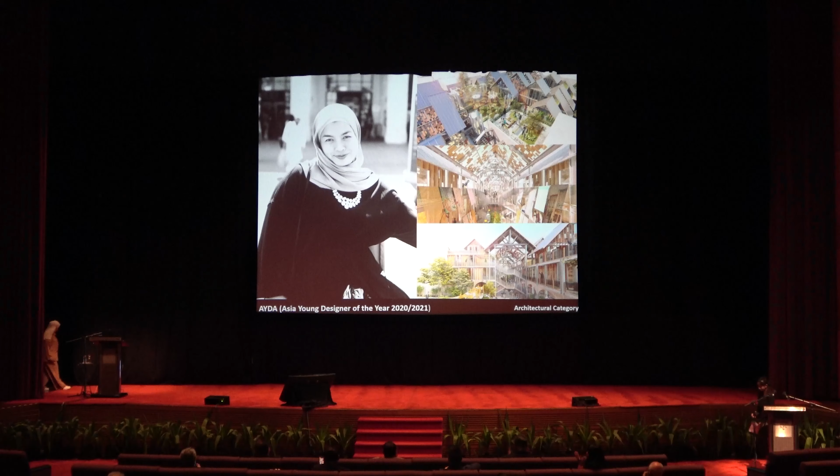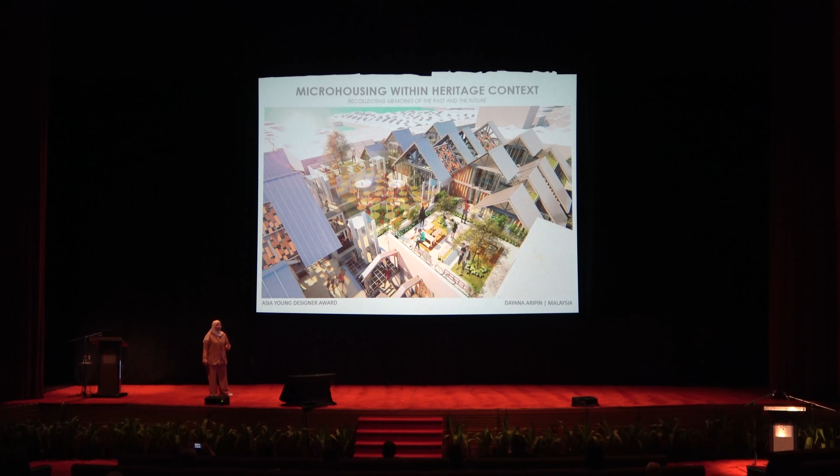Hello, can you hear my voice? Okay. Hi everyone, my name is Dayana binti Arifin and today I will be presenting about my project, which is microhousing within heritage context.

I believe some of you may have heard this quote from Jan Gehl, that each city has its own soul, built by the people, and it should not be erased by gentrification, because this is what is currently happening in Georgetown. This project, of course, is to instill back the old soul into the city.

Before that, let me take you back in time. Georgetown, as one of the UNESCO heritage cities in the world, was known as a trading center, and it flourished with so many people. And the cultures, what could I say, they're so vibrant. However, due to the gentrification and modernization, the soul of the city is dying.

As far as I remember, Georgetown has always been socio-culturally robust, attracting so many people. It is just a matter of time that the core soul of the city will be forever gone.

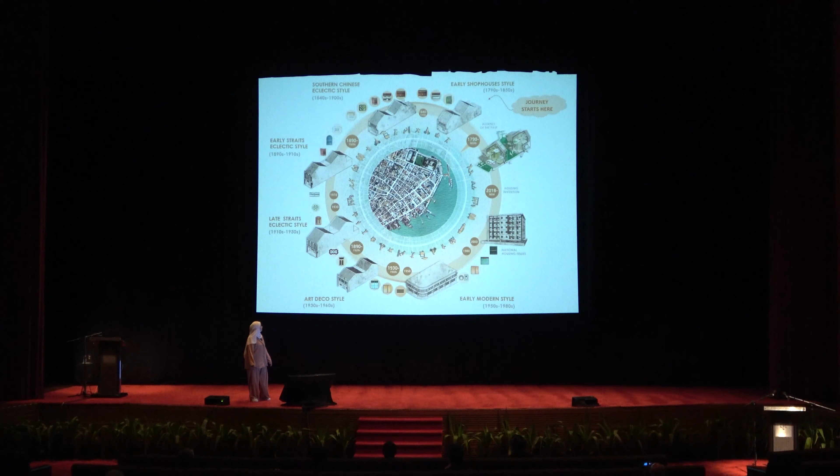As a summary, this timeline is showing the beautiful Georgetown itself. However, due to the Rent Act that was repealed in 1999, it caused many of Georgetown's people to move out of the city center. This has not only changed the demographic, but also the traditions among the community that it once had.

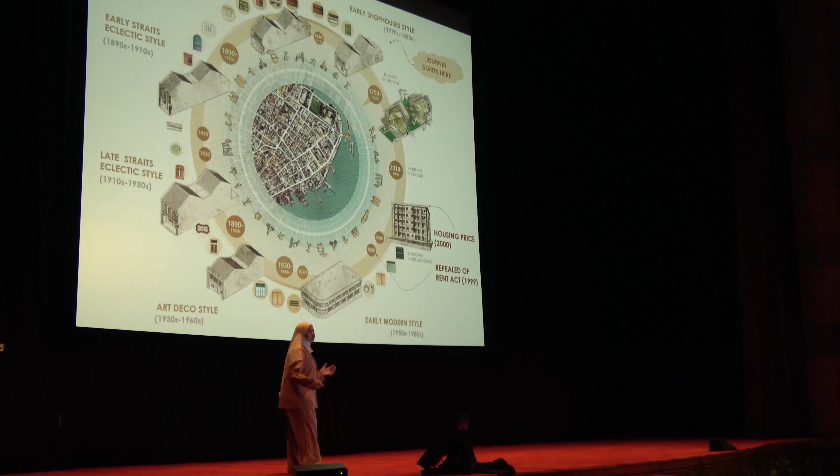And sadly, as it seems, Georgetown, or on a larger scale Malaysia, we have been facing unaffordable housing issues for a long time. Just imagine that people like you and me here, young people, we can't even afford to buy a house now, let alone rent a house within the city center.

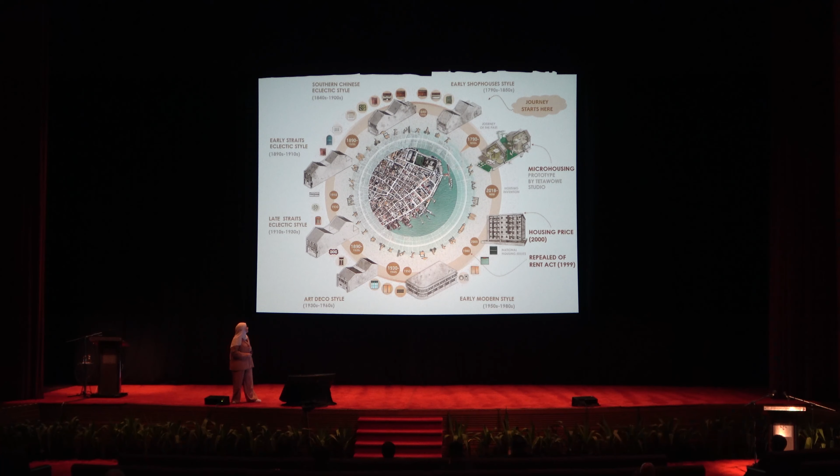And I believe that this is where microhousing comes in, where it demonstrates the capacity of providing homes in between urban spaces. But in this context, it is a city of heritage, Georgetown.

As the name depicts, microhousing is a smaller scale house within urbanscapes. The intention is to cater for urban dwellers who want to reduce their rental price and traveling time to workplace.

This intervention program could also bridge the gap of social decay and economical issues, as right now Georgetown has been relying too much on tourism values. And look at us now - we have a pandemic. Where we are at, the city is dying, really.

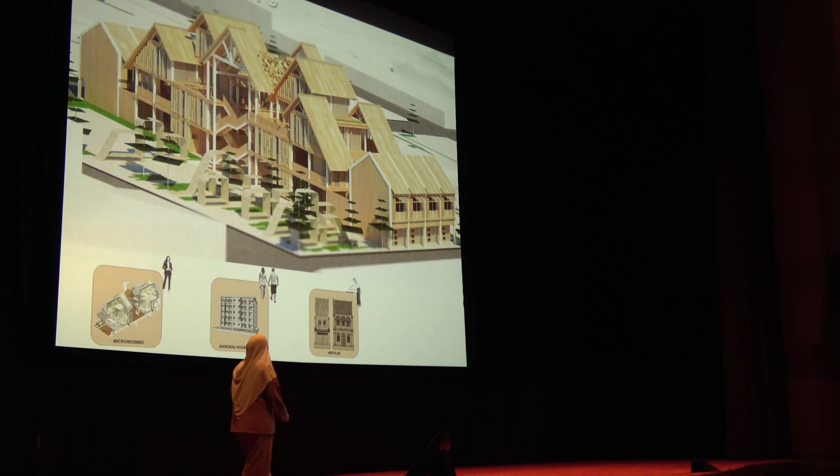And it could be bridged by the people. I believe that we can interpret this as mutualism with regards to the context.

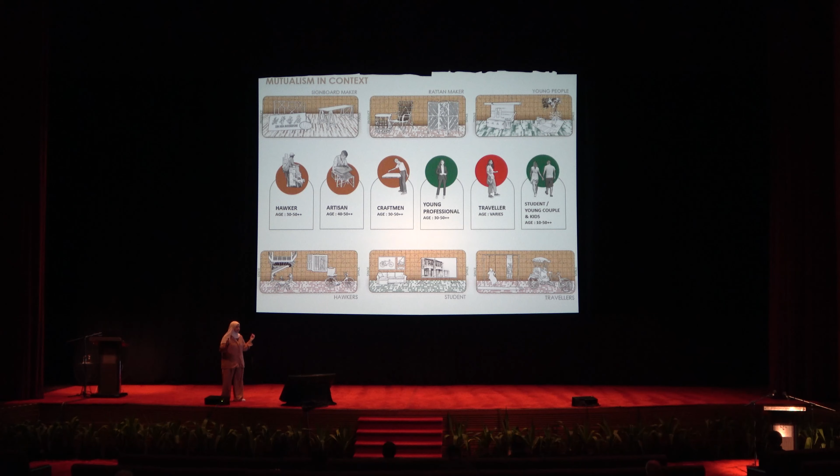Well, technically speaking, the dying cultures can only be preserved if we allow the older generations here to pass their traditions to younger people, especially in the current time where isolation is needed. The interactions among those two groups are limited without proper intervention.

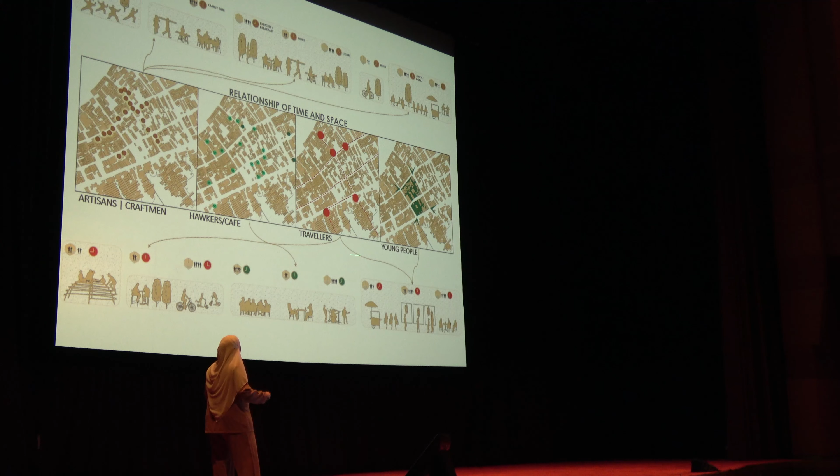And the idea is to bring current generations into the site by allowing interactions among themselves. This has led to the documentation of daily activities based on the demographic study. With this, we get to understand the idea of placemaking.

Just imagine this, that the coexistence of different backgrounds and an urban rejuvenation program combined will give far greater value to the people, let alone the city itself, Georgetown.

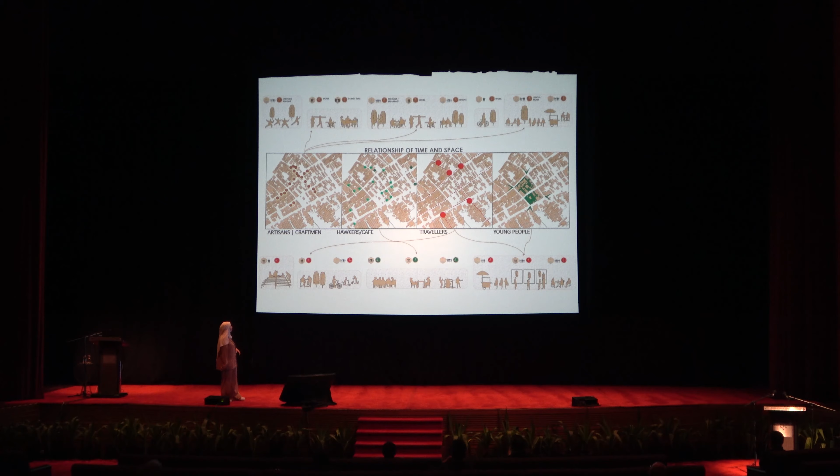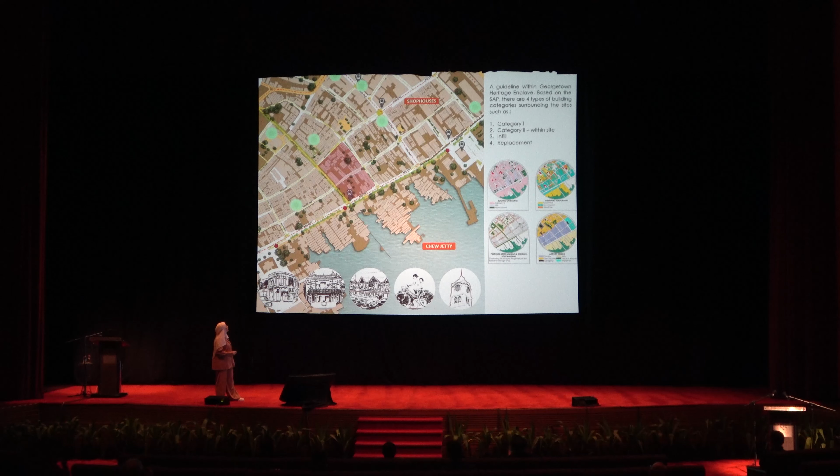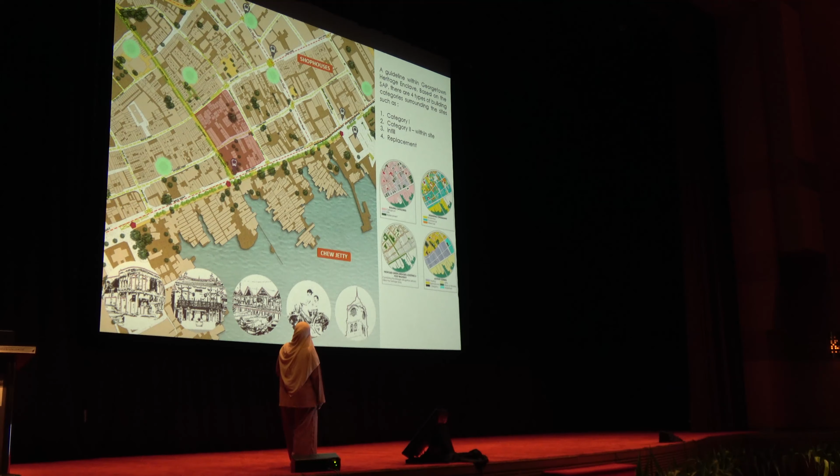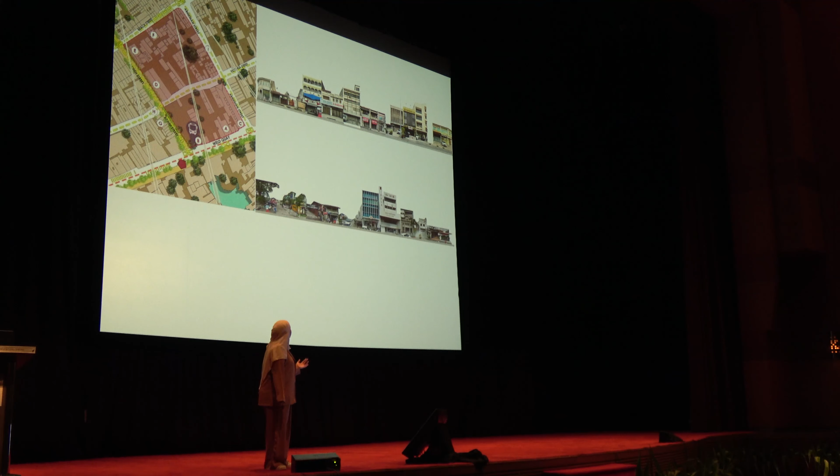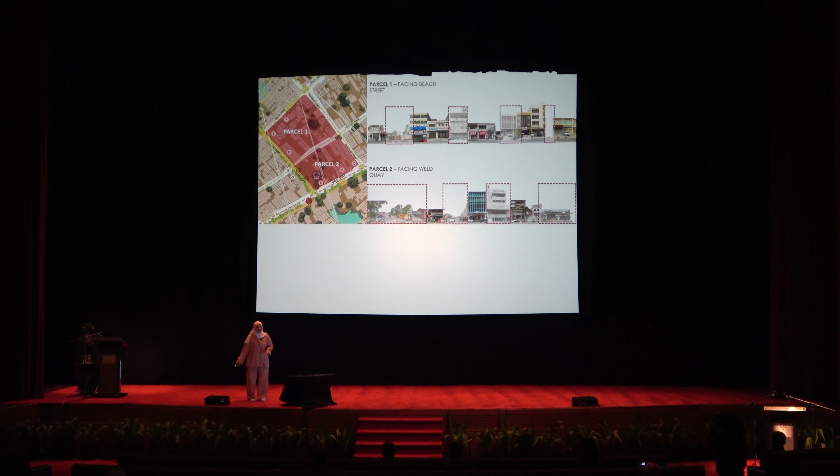And the site is divided at Victoria Street. The reason to do so is to play with two different urban components, where parcel number 1, located at Beach Street area, has a lot more category 1 and category 2 buildings, while parcel number 2, located at Weld Quay area, has a lot more infill spaces with replacement buildings that are not associated with the heritage timelines. Regardless of how playful the intention is within the zone, the site must always be respected.

As I walk into the site, I realize that as a designer, as an architect, or as a policymaker, the first thing we need to do is the revitalization program of the old shop houses along the perimeter. And adaptive reuse can be the perfect way to breathe new life into the city.

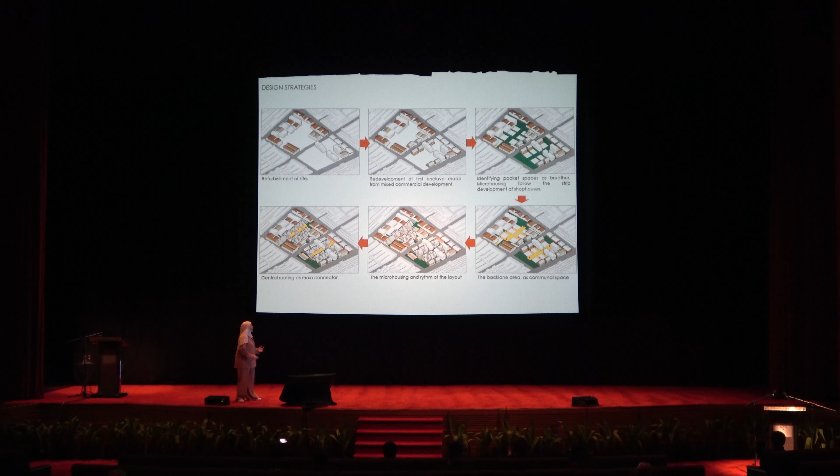And microhousing can be placed into the second layer, secluded behind the shop houses. But the question is, what kind of sub-programs will tie all of them together?

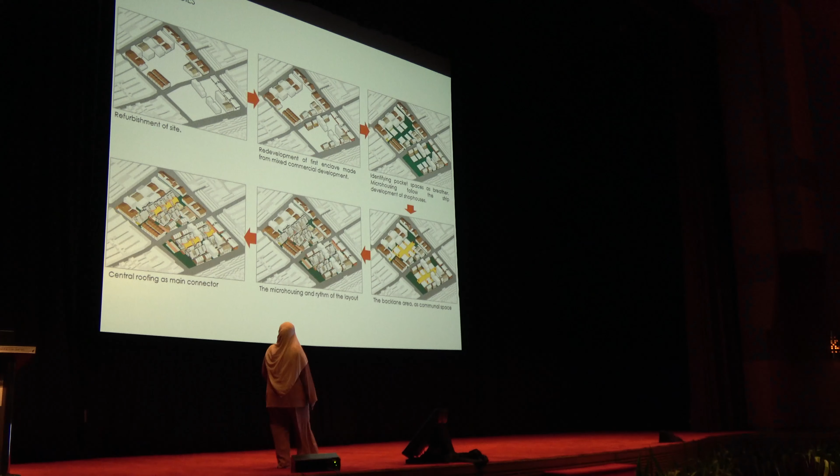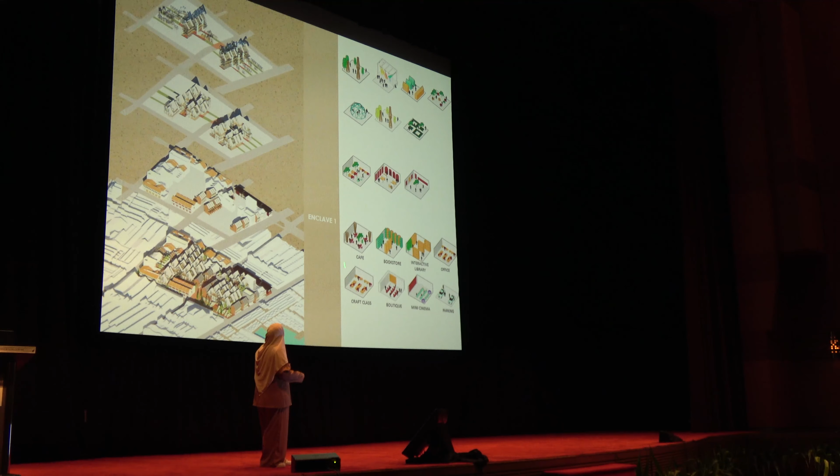Well, this exploded axonometry shows all the strategies that I had. Let's say on the first enclave, we give back the tenancy of the old and new shop houses to rattan and old signboard makers. It would encourage higher demographics into the site, given the condition that the public must have higher awareness about our culture in Georgetown.

And obviously, the microhousing will be placed into the second layer, but we could also turn some of the units there into daycare facilities, knowing that there will be families with little kids staying within the microhousing.

As much as we take the land for the construction, we have to give it back to the community. In order to do that, I place all the programs on the ground floor, connecting all those people together.

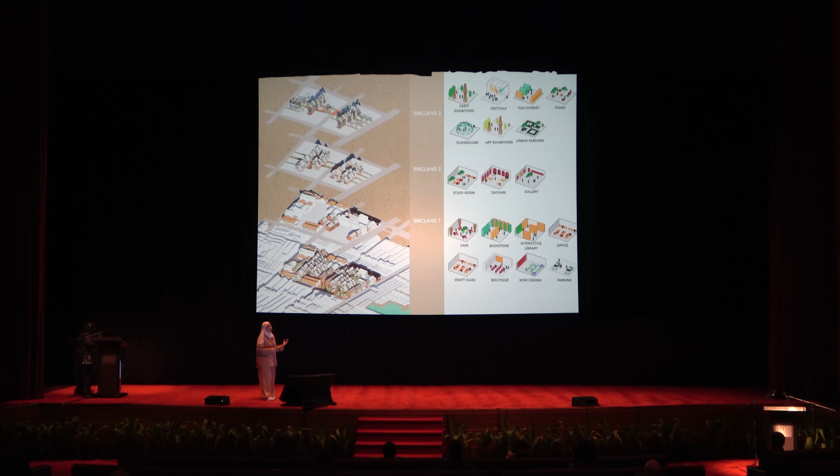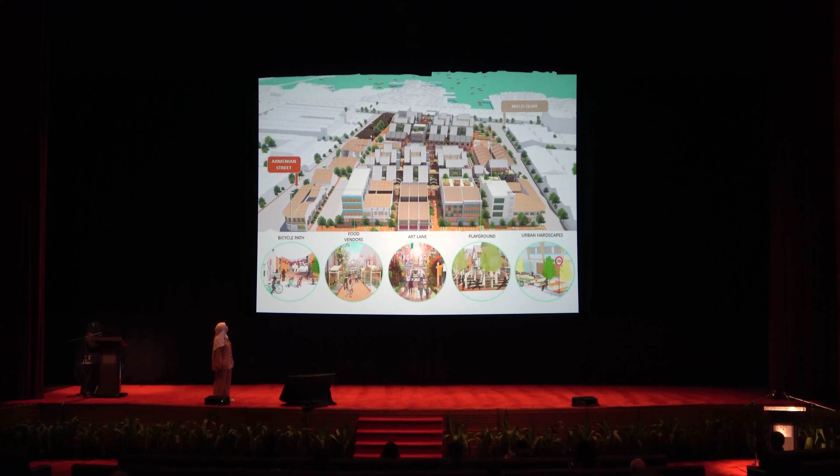Now, imagine you are in Georgetown, walking from Armenian Street to Aceh Street. Then you stop by some small lanes and see hawkers selling hot dogs or ice creams, and you are amazed by the artworks. Wouldn't it be a wonderful day to enjoy?

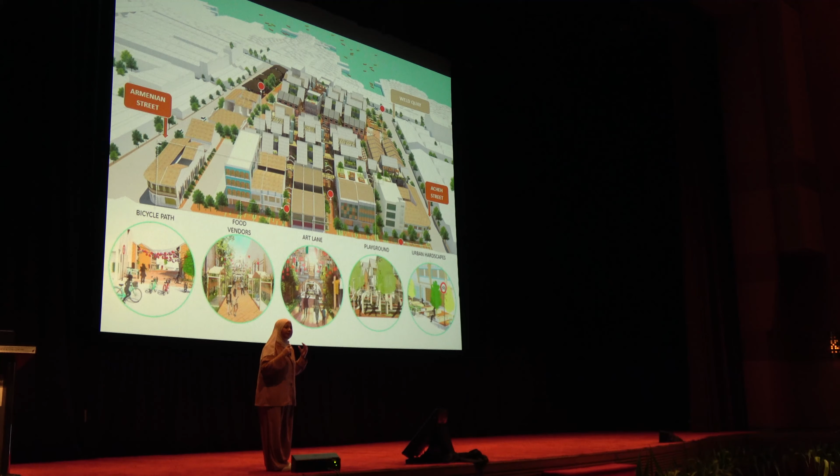Suddenly you see kids riding bicycles and you manage to see your friends or daughter eating at the kopitiam. If I were you, I would greet them with smiles, because what I had that day was like down memory lane. Those kinds of experience would make me want to interact with people more, especially in this pandemic time where social interaction is hard to achieve. It gives us loneliness right now.

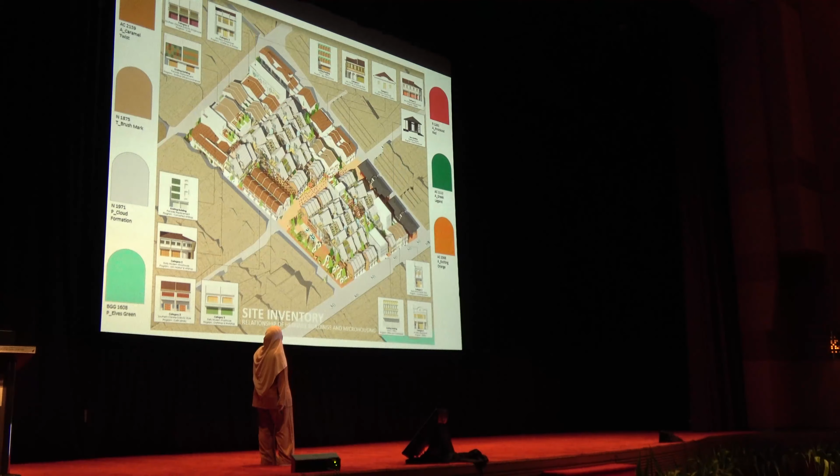Like in this overall image, the urban treatment must not only consider the hardscapes, the softscapes, or even the urban heat island issues we're facing now, but also the well-beings and emotions of the people here. After all, those elements correspond to each other.

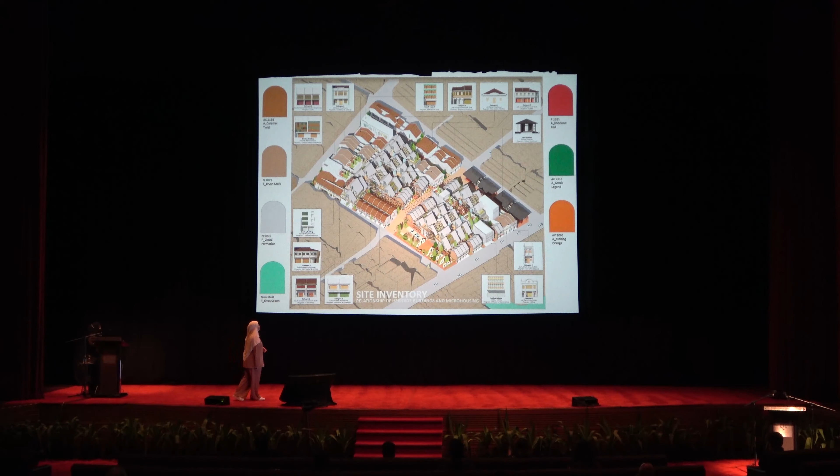The relationships of the old and new will always be interconnected with the roots and its people. That is why I believe it is important to acknowledge the urban fabrics based on the layering of space and time. Just like in this image, where the two sites combined have around 5.2 acres of land, would be nothing without human activities, like empty shells.

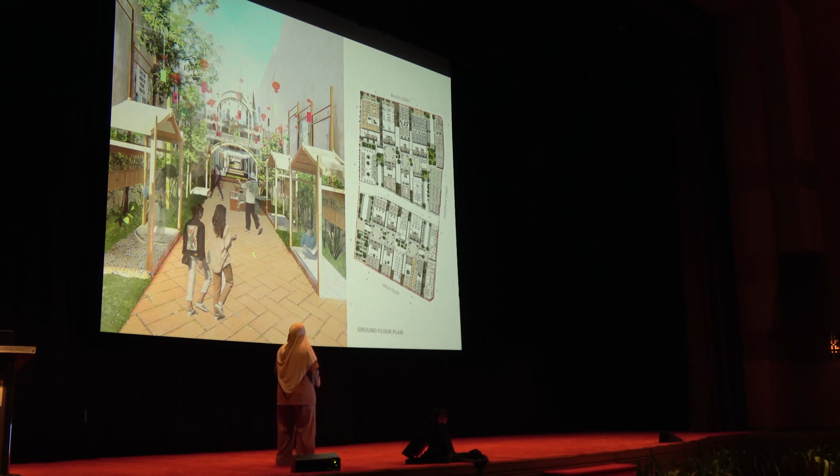As we continue walking into the site, we could see there are about 117 units of micro-housing, as well as 27 units of new shop houses located at the perimeter. The negative space will be turned into active areas, acting as a transition connecting the main road into the internal parcel. One example here could turn into Vendor Street.

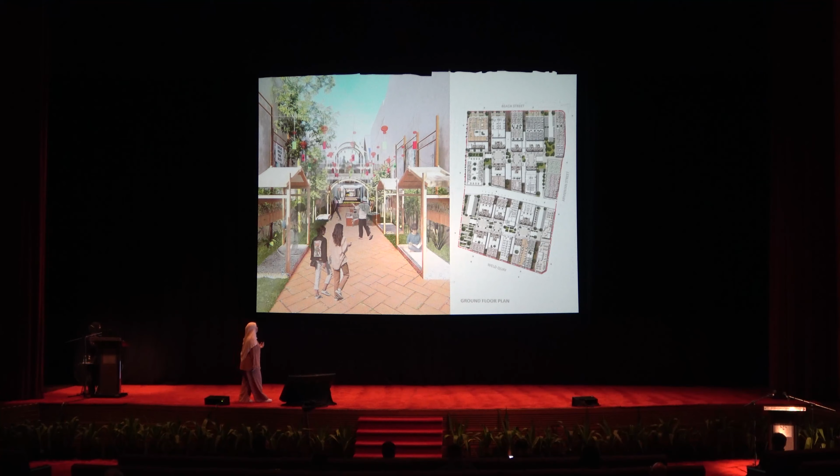Before we go to the upper level, there will be little cafes and a hawker center greeting us at the third enclave, where the staircases are located. This is to give indirect interactions that could happen among the community. Who knows, suddenly the hawker becomes our best friend, or the fruit seller is actually part of our family lineage. I believe that would be so interesting, to track down our ancestry line.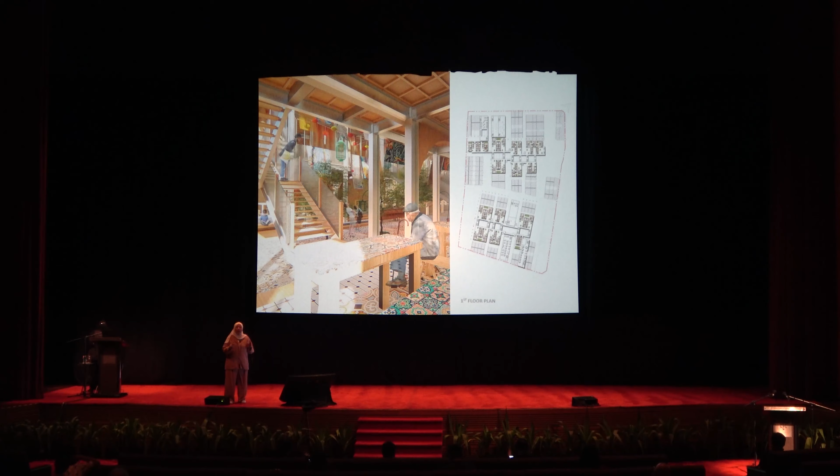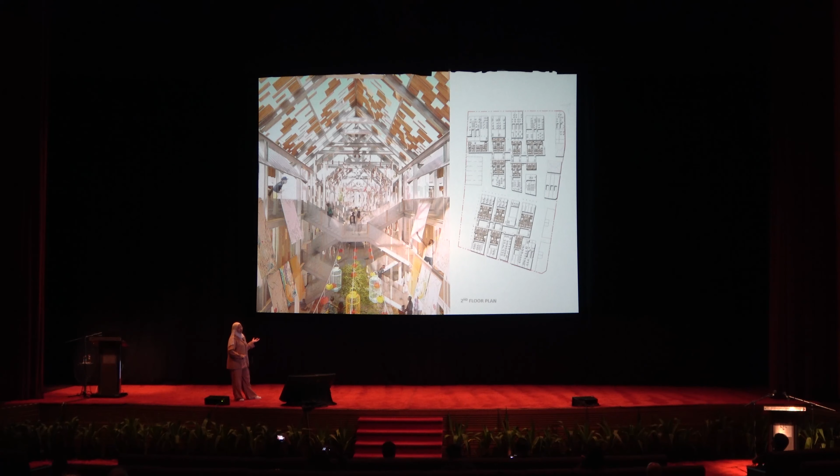We could see here that the communal activities are displayed on the ground floor from the second level, and this is where the light and shadows play important roles in adding a lively ambience to the site.

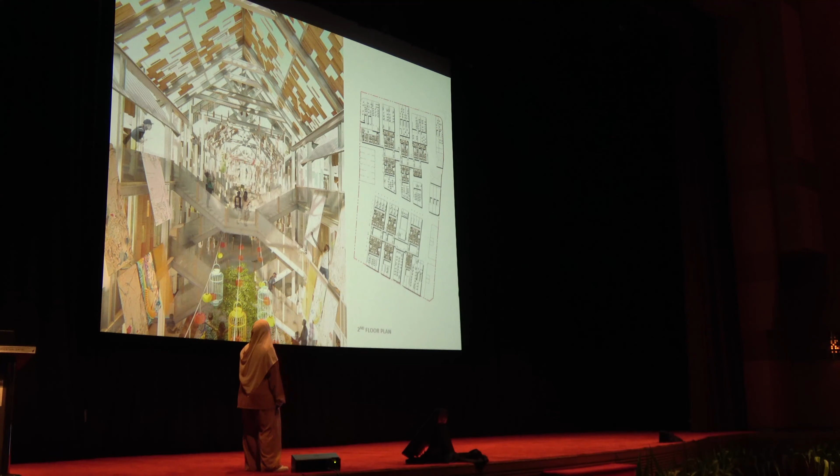As we go to the third floor, the number of micro-housings is dramatically reduced. This is to give more private sharing spaces. The image shown here assists the walk-through moments under the central roof, especially during daytime.

For the micro-housing units, I have around 4 to 5 types, but only 4 are shown here, ranging from 150 square feet to 300 square feet. The modules are actually extendable based on needs and requirements.

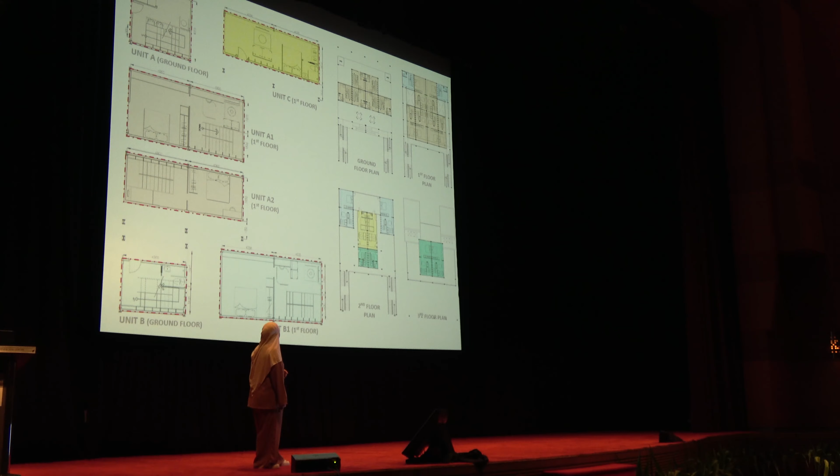As for the sustainability features, the first thing to look at is the site planning, which involves the refurbishment of the two sites combined with the old heritage buildings. The micro-housing is designed with little pocket spaces in between.

This is to enhance a better daylighting effect as well as the landscaping effect. The last part, sustainable timber, is used at the central roof, which will be shown later in the video.

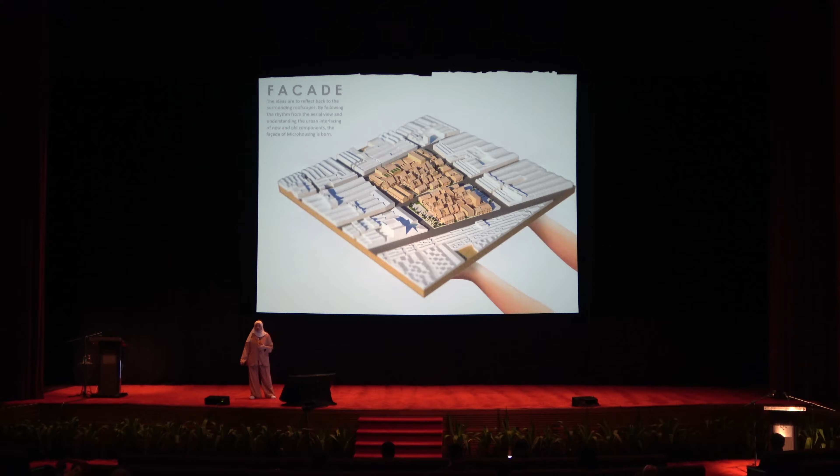For the facade, the ideas reflect back on the surrounding roofscapes by following the rhythms from the aerial view and understanding the urban interlacing of the new and old components. The facade of the micro-housing is born.

The screen of the facade is a reflection of the identity of places without taking direct images of the shop houses. The design is staggered from the first enclave to the third enclave as a way to protect the vista. The insertion of metal elements, like the king post roof structure, is adopted to give subtle impact to the design, and the overall height is limited to 18 meters from the roof edge.

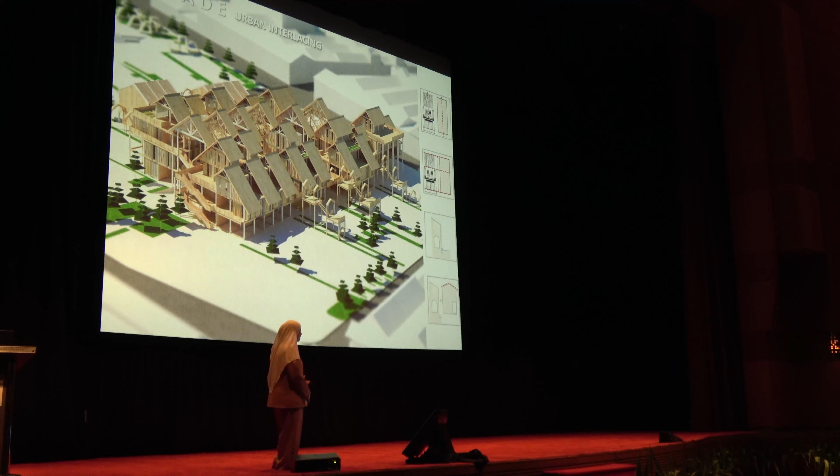For the structural elements, they are divided into 5 layers, but the main components are made up of steel and timber panels.

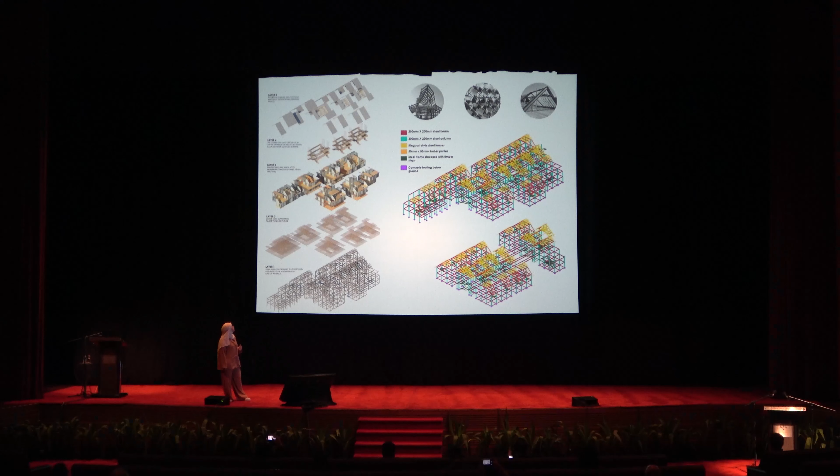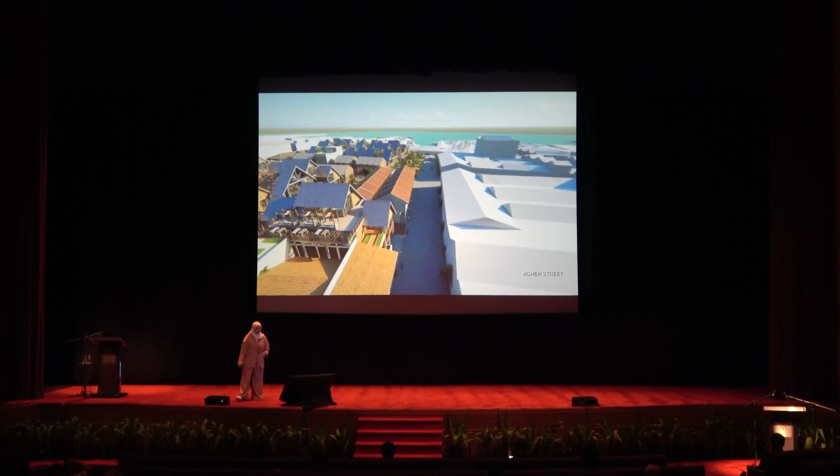Before I end this project, let me take you back into this video. This project is created to reminisce the beauty of Georgetown, and as we walk along Acheh Street to Victoria Street, the soul of the city will prevail.

We have to understand that we can no longer freeze human activities, regardless of how hard we try to design the city.

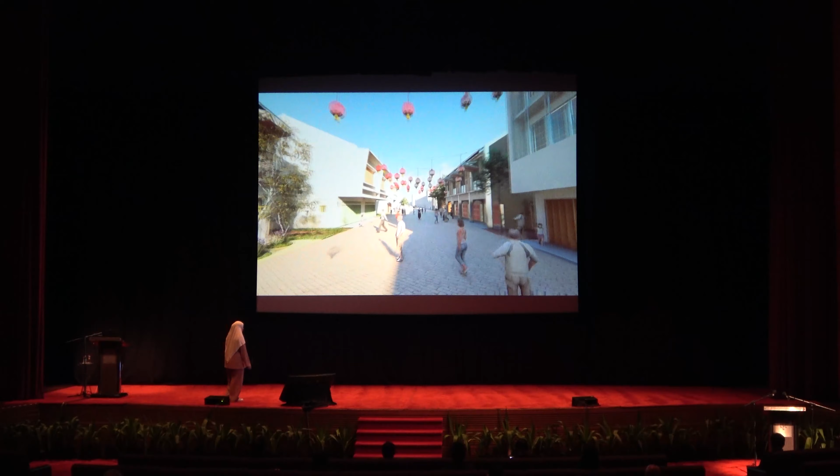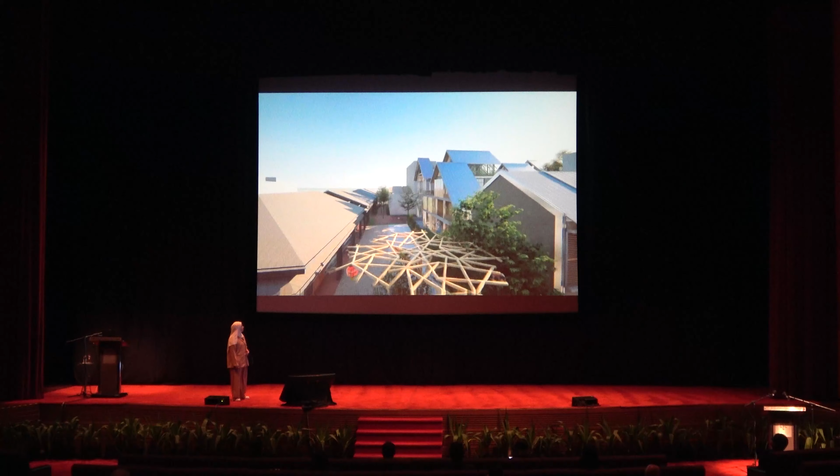It is with hope that micro-housing could become the catalyst program to bind the people and the visitors all together.

In order to understand the place itself, we have to learn to acknowledge the past and the present, because it is not always about the future.

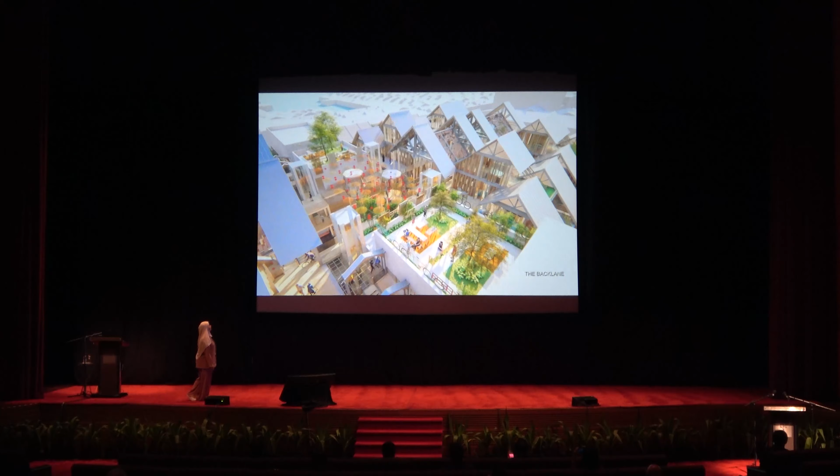These are the walkthrough videos connecting the main street to the internal parcels.

I believe that micro-housing will be the future. For sure, the soul of the city can be repainted by the legacy of the people.